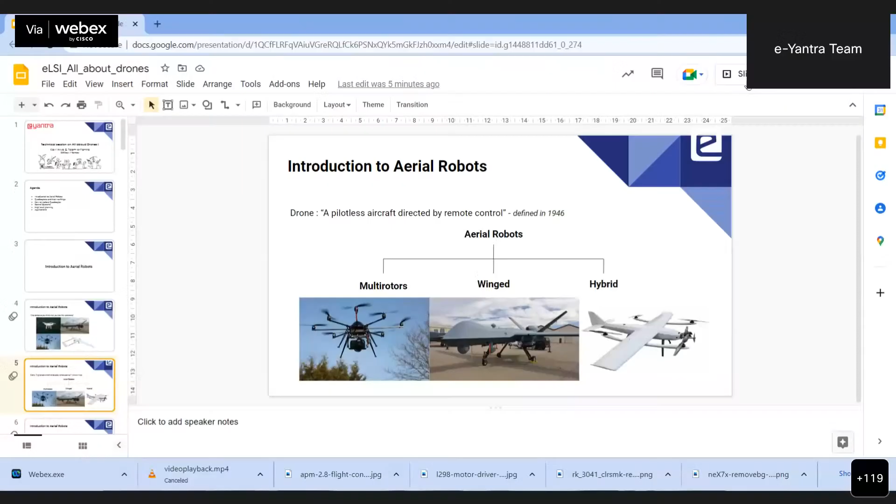So let me share my screen. Is my screen visible? Ruchi, can you just, yeah, it's visible in full screen, right? Yes, sir, it is visible.

Okay. So let us start. As you all know, this session is all about drones, and it is presented by the e-Yantra team, with Kavi Arya as principal investigator and myself conducting this session. I'm Smit Kesaria, as Ruchi introduced. I am a master's student at IIT Bombay. Previously, I was also a participant of e-Yantra. Then I joined e-Yantra, and I am a staff member of e-Yantra also. And in general, I am very crazy about drones, very interested in drones and aerial robots in general. So, yeah, that's about me.

And okay, we can start the session. So, let's first discuss our agenda today. These are the 6 points that you all saw in the poster also. What we'll do is first introduce ourselves to aerial robots, and then we'll specifically look at quadcopters and their workings, and then we'll get to know how does one make a quadcopter?

Then we'll see some little technical details about the control systems in drones, and then we'll just go through the high level planning, and finally the applications of drones in general, of quadcopters in general. So let's start with the introduction to aerial robots.

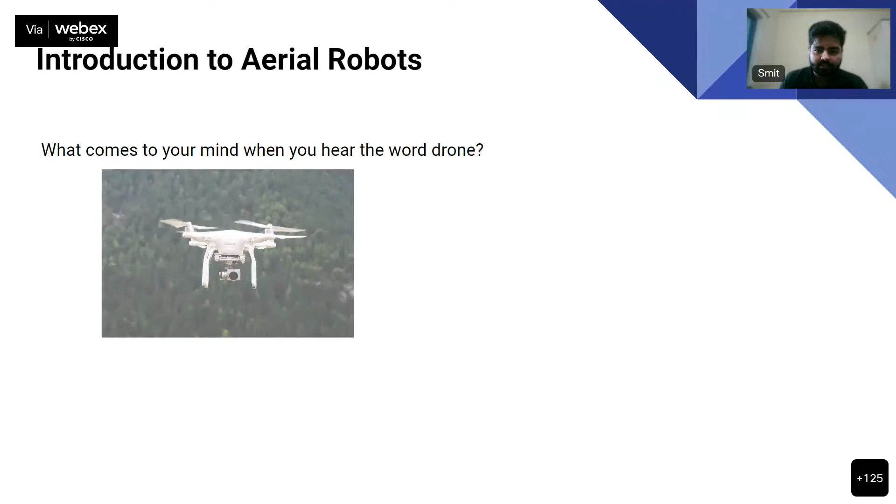Now, what comes to your mind when you hear the word drone? I'm sure most of us here might have seen or heard about drones in the movie Three Idiots. That was actually the first time I saw a quadcopter flying, or drones in general, the term drone being coined. I think that's the case with most of us. But what does come to your mind when you hear the word drone? Is it this image, or something like this, or something like this, or is it this?

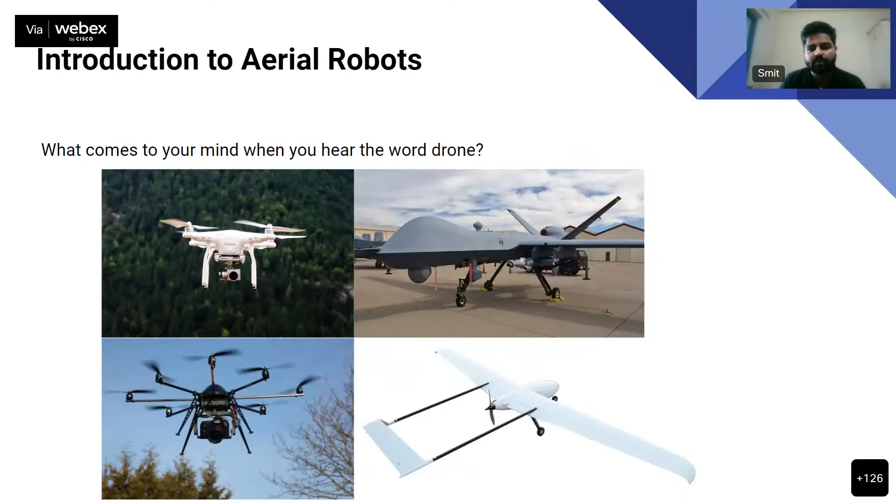I think most of us would agree that the first one is what comes to our mind when we think about drones. But let me tell you, all of these are termed as drones. Even the bigger aircraft you see on the top right is also a drone, the small plane-like thing on the bottom is also a drone, and this huge camera thing is also a drone. So let's just define what a drone is first.

It was coined back in 1946. It's a simple definition which says a pilotless aircraft directed by remote control. So if a human is not sitting on an aircraft and it is being controlled remotely, either by a computer or by a human, it's called a drone. Let's not use the word drone because it is very broad. I'll use the word aerial robots, and we'll classify aerial robots into basic things like multirotors.

These are usually plane-like structures. Again, a human does not sit on the plane. It's a remotely controlled or autonomous aircraft. So robots based on wings, usually with a single rotor or engine, or it can be a dual rotor also. But primarily, if it uses the wing to generate lift and fly, it's called a winged aircraft.

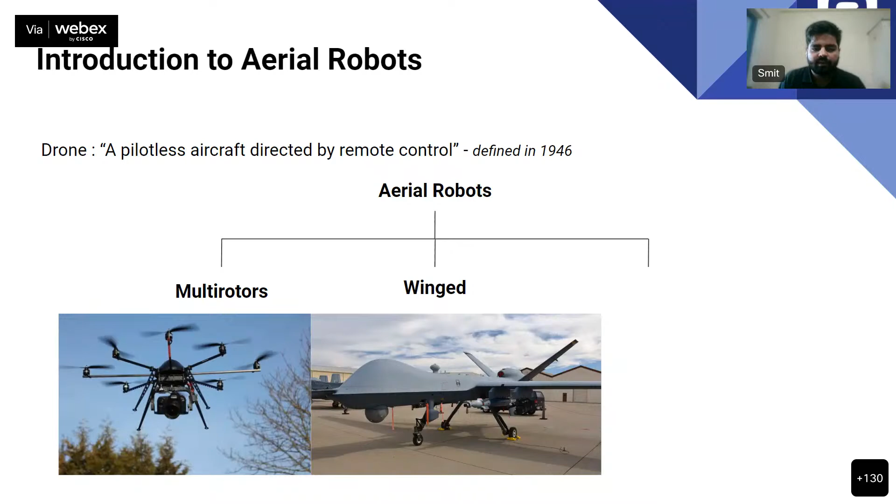And then there are hybrid aircraft, which use both. It has wings to generate lift. People might know how wings generate lift; I will not go into details, but wings do generate lift when flying in air, and if the aircraft uses wings to generate lift as well as multirotors to maneuver or do some actions, then it is a hybrid aircraft. You can see the first and second images; if you combine them and make something hybrid, this will be the result.

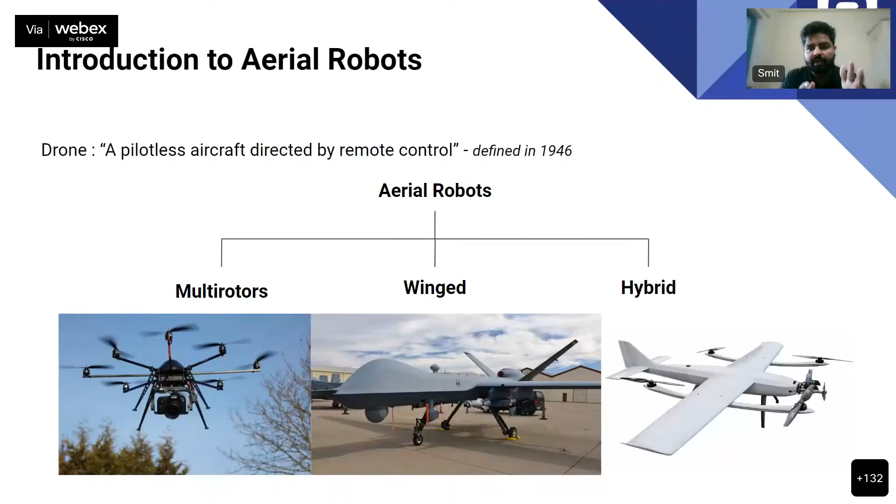For today's session, we'll specifically revolve around multirotors and not winged and hybrid aircraft. And even in multirotors, we have to see what kinds exist. Again, the multirotor definition is very simple: a rotorcraft with more than two lift-generating rotors.

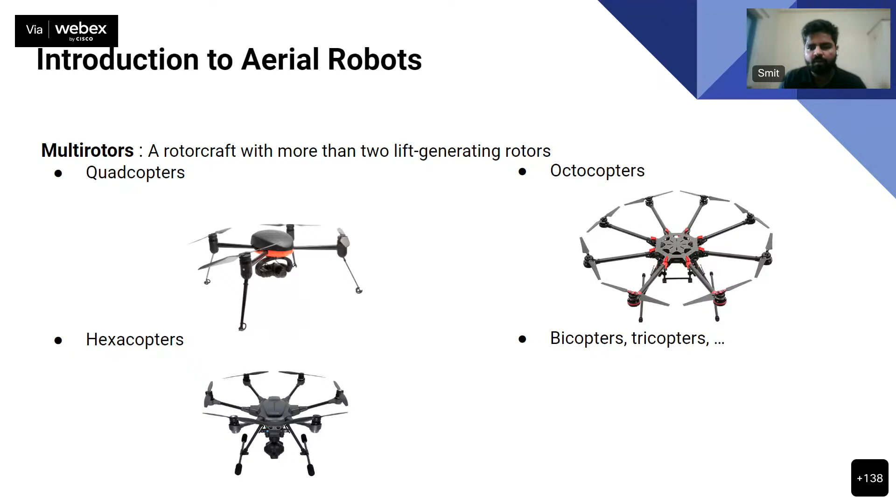Similarly, we have octocopters. You add two more motors, and it becomes an octocopter. Octo, by the name, is 8 copters. You can see in the image, they have 8 propellers, 8 motors. And if you ask why you want 8 rotors if you can do the job with 4 or 6, the answer is the same. If you want more weight carrying capacity, you have to have more thrust. Those extra motors give you more thrust, and agility also increases.

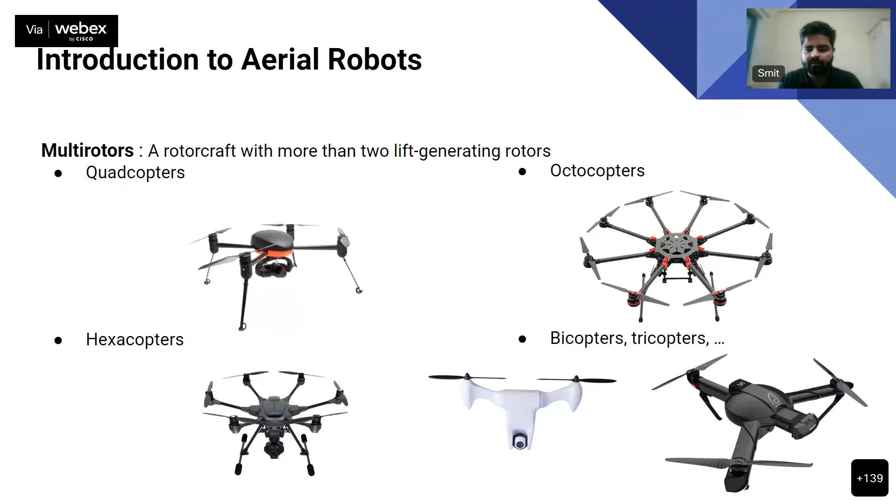You can also use fewer than 4 motors. There are bicopters as well as tricopters, and they do fly. They stabilize themselves with a few more actuators. But the actuators generating the thrust, the propulsion for the aircraft, are 2 or 3. If they are 2, it's called a bicopter, and if they are 3, it's called a tricopter. But there are some rotating actuators inside. These are very uncommon, because they are difficult to control and difficult to manufacture, and they are not famous yet. So that's about multirotors.

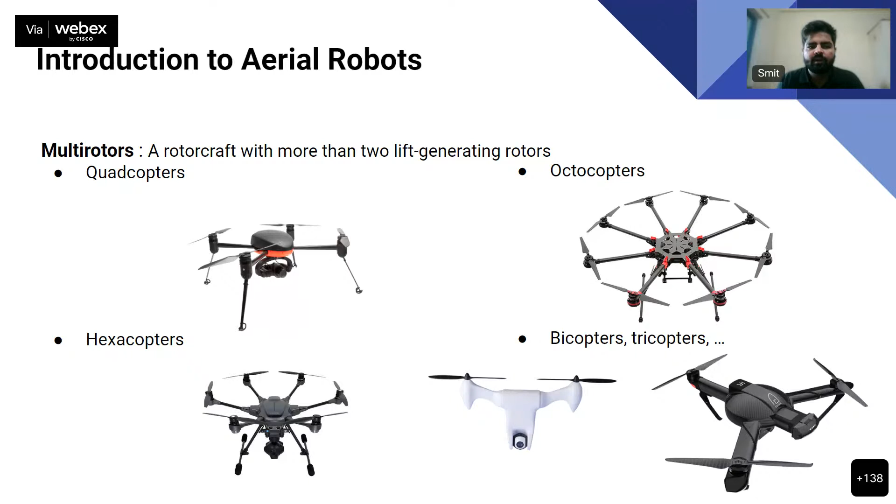Let's deep dive into quadcopters, because they are very famous, very easy, very common. Let's see the workings and functioning of quadcopters. As we all know, a quadcopter has 4 propulsion systems, 4 propellers, 4 motors, 4 thrusters. The 4 motors are usually placed in a square symmetric shape, although there are unusual geometries like trapezium or rectangle. Here you can see it's symmetric. The distance between 1 and 2, 1 and 4, and 3 and 4, every distance is the same. So it's a square geometry.

As I said, there are unusual geometries recently being used for different purposes, but let's not go into that. Usually, for a quadcopter, the propellers are placed in a square shape. They can be numbered in any fashion; different protocols are followed by different systems. The point to note is that 2 of the motors rotate in one direction and the other 2 rotate in the opposite direction. Motors 1 and 3 in the figure rotate clockwise, and 2 and 4...

I think there's disturbance from someone else also this time.

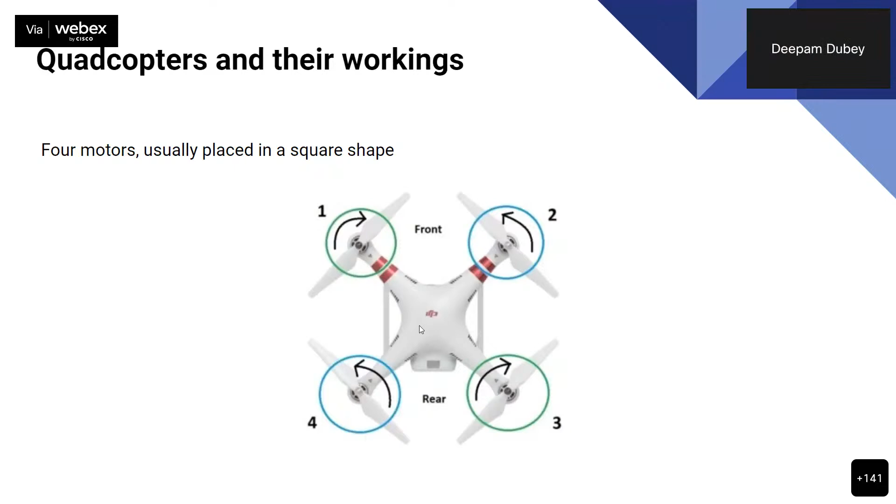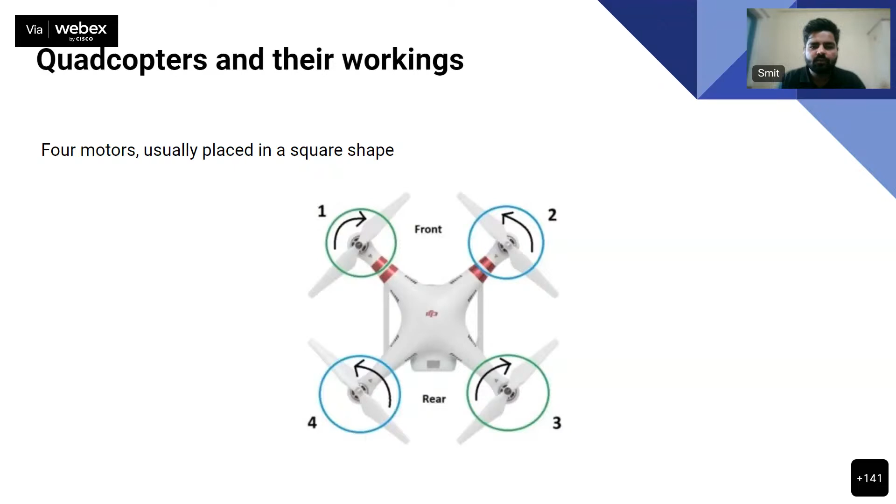Okay, I'll continue anyway. Motors 2 and 4 rotate anti-clockwise. This configuration is not random, it's specific. The point to note is that diagonally opposite motors always rotate in the same direction, and adjacent motors rotate in opposite directions. We'll figure out why this is the case, and why we can't just rotate all the motors in the same direction. We'll see in the next slide how it flies, first of all.

Since it has only 4 motors, there's a thumb rule of physics that says the number of actuators gives you the number of degrees of freedom. I won't go into detail about degrees of freedom and actuators, but if there are 4 motors and 4 propellers independently controlled, you can have 4 degrees of freedom. You can move in 4 degrees, not more than that.

Deepam, I think your mic is on. Can you please turn it off? Sir, can you please repeat? Repeat what? The thumb rule of physics you were saying. Yeah, sure. Just a second. Is my screen still visible? Yes, sir, it's visible.

Okay. What I was saying is this robot has 4 actuators. 4 actuators meaning 4 moving parts, which are the 4 propellers.

In a robot, if you have n actuators, at max you can have independent motions in n degrees of freedom. What is degree of freedom? Let's say you are moving in a particular direction, like this x-axis. That's one particular degree of freedom, moving in that direction. If you can also move in another direction, that's another degree of freedom. So lateral movement as well as rotational movements are considered degrees of freedom.

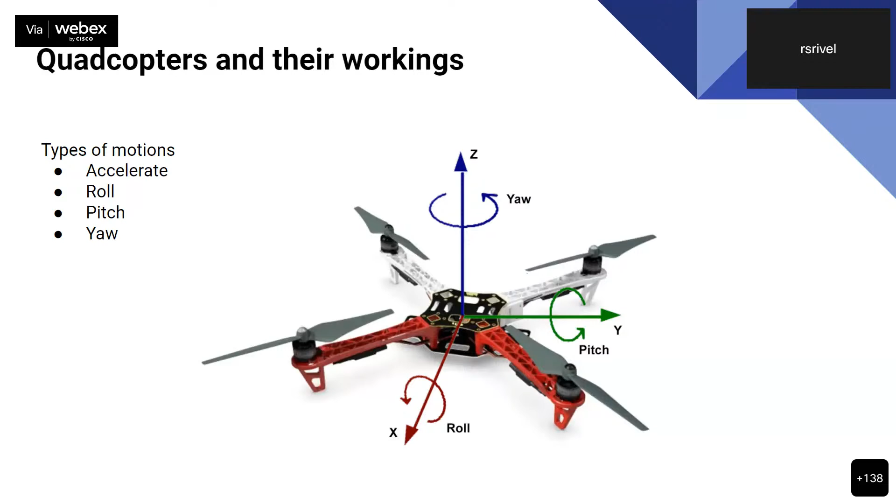I think your question is how does the quadcopter adjust its orientation by itself - is that your question? By itself, or do we have to adjust it, sir? Yeah, it's a good question. We will come to this answer towards the end, in the control systems part, where we'll see how a human pilot, or the drone itself, controls its orientation. We'll look at that later. Right now, in this slide, I'm just showing the working of the motions it can do.

We will solve that doubt definitely. So coming back to the pitch point - if I want to pitch the quadcopter, the answer is pretty simple. The back two motors, if I slow them down, and the front two motors, if I turn them faster, there will be an imbalance created across the front and back, and it will try to rotate. So that's intuitive.

But now the difficult part is how does the drone yaw? Because the thrusters were pointing downwards in the quadcopter, and we could easily create an imbalance for rotating across roll and pitch. But how does the drone yaw? Because yaw is a planar movement - the plane in which the quadcopter itself, and all the propellers, are situated. So can anyone guess how the quadcopter yaws, or does anyone already know the answer?

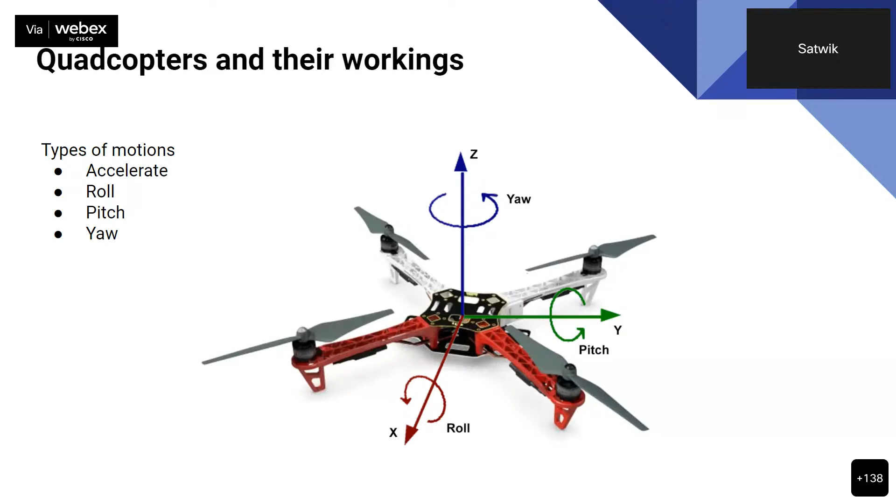The diagonal rotors will have different motion - one clockwise, one anti-clockwise. Okay, I think what I heard is the diagonal motors should rotate at a different speed, and the other diagonal rotor should rotate at a different speed - to anti-clockwise. Is that what you're saying? Correct, okay, you're also very, very close.

It's almost correct - sir, by varying the speed of diagonal motors. I didn't hear that, sorry. Decrease the speed of diagonal motor. Okay, that will do the job.

Yeah, the answer is correct, but that will not do the job completely, so if you decrease or create an imbalance.

The principle we are using here is the principle of rotational momentum. That's again a physics law: if a particular body rotates around its own axis, it has momentum. Just like a body with mass traveling at a particular speed has linear momentum, a body rotating around its own axis also has rotational momentum. And the rotational momentum of the entire body has to be conserved.

So the very first question I had was, why not rotate all the motors in the same direction? If I rotate all 4 motors in the same direction, all the rotors' rotational momentum will add up and it will be non-zero. It will not balance, it will not be zero momentum. So since the system has to conserve its momentum, the drone as a whole will rotate in the opposite direction if I move all the rotors in the same direction.

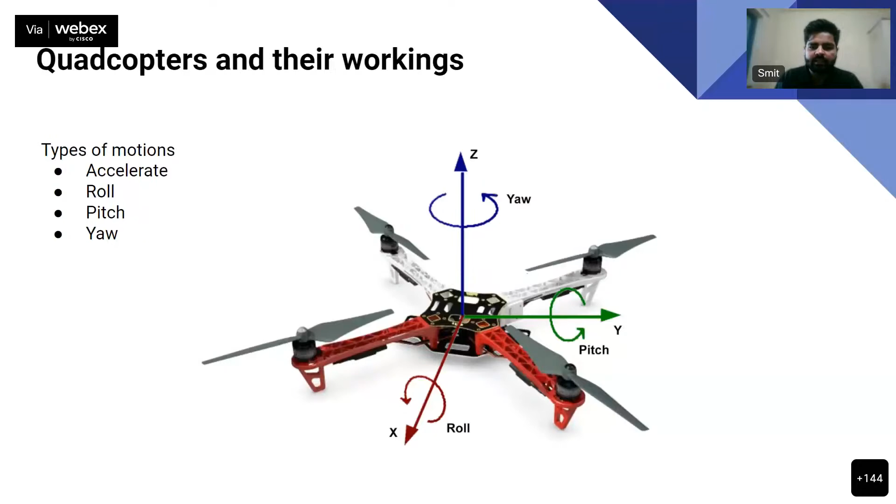So the first thing to start with is a frame. Then to fly, obviously we need propellers. So propellers should be there. But to rotate those propellers, we need to have some actuator, which is a motor. And usually, since we are making a small version, we will go with electronic devices, which is a motor again. So we'll see which kind of motors we should use.

And to drive these motors, it's not that simple. You cannot just connect it to the battery directly and the motor starts rotating. That's not how it happens. So you have to have a motor driver. So again, who will give a command to the motor driver? Should I give the command to the motor driver directly, or should there be an intermediate flight controller between us? So the answer is a flight controller should be there.

We'll later know why. So yeah, the flight controller is one of the components that we need, that takes care of all the computations and all the adjustments and intelligence on the quadcopter. So one physical board has to be there, a small kind of computer has to be there, the flight controller.

And then once the quadcopter is flyable, how do I interact? How do I send it commands? So I have to have some kind of wireless system, because I cannot make it wired. It's a remote controller. So it has to be a device, and its receiver has to be on the quadcopter. So remote controller, transmitter, and the receiver.

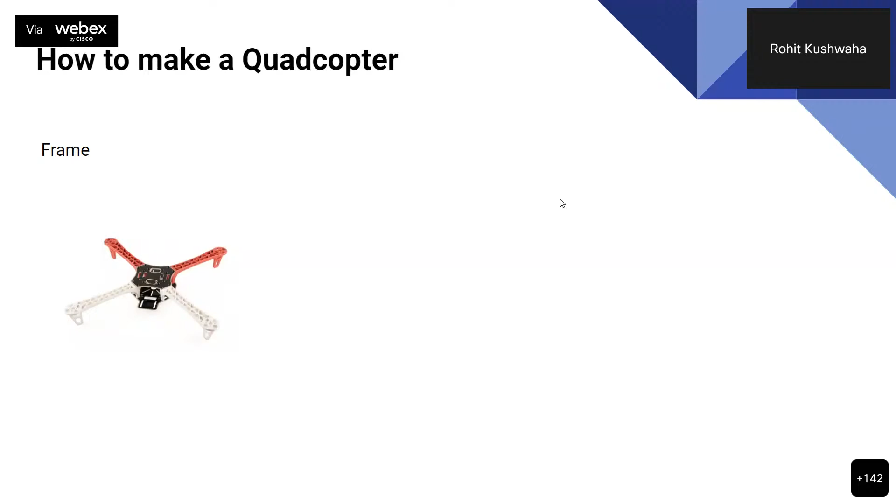Yeah, I'm back. So what I was saying is we need a frame to start with, and you can build your own frame if you want to, or else you can just buy it from the market. Let's see what the frames look like. The previous one we saw, the red and white frame, is one of the frames made of plastic.

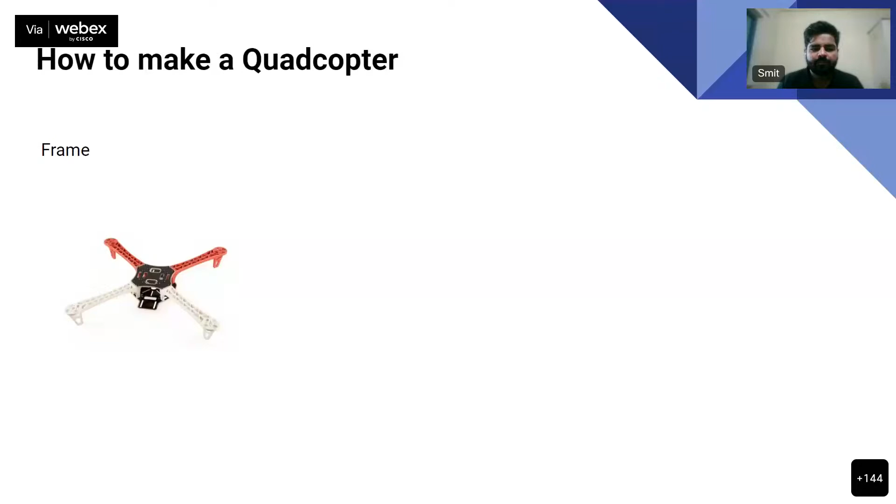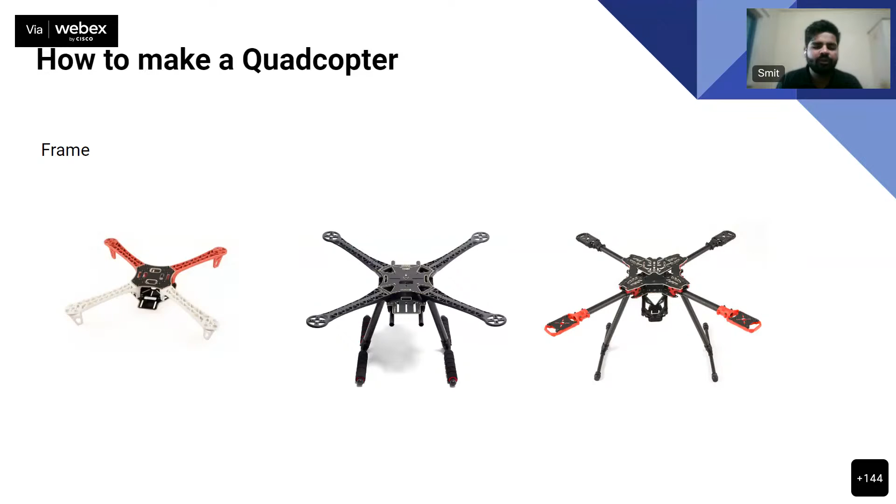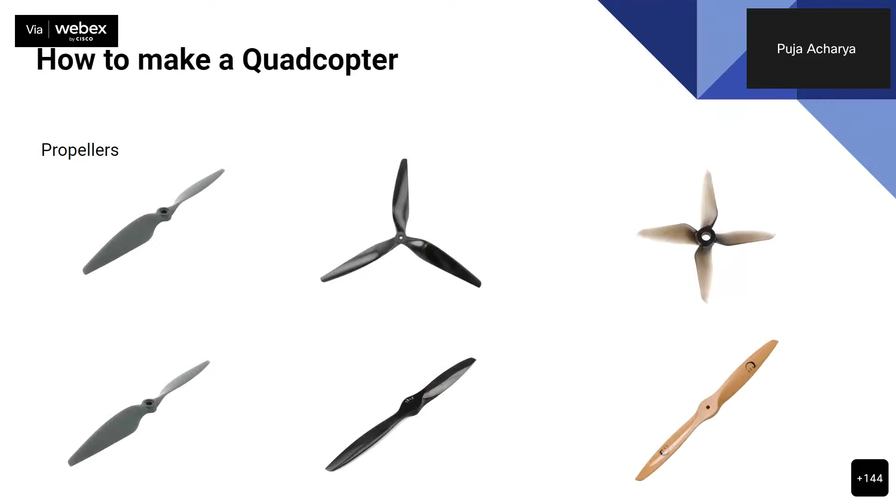Yeah. Can I ask a question on blades? Sure. Sir, why do we need 3 blades, 4 blades, up to so many blades? What is the purpose of using multiple blades in our propellers? Yeah, so the question can be answered with aerodynamic supporting theory. But if you have more surface area and more number of blades at a particular given velocity, the same velocity, you can have more thrust.

So these are powerful propellers. So if you want to have the same motor, same velocity, but want more power, then you can increase your blades. That's the simplest answer. Okay, sir. Thank you. But at the same time, you will decrease your efficiency. So battery power will be draining a lot in that case. So, yeah.

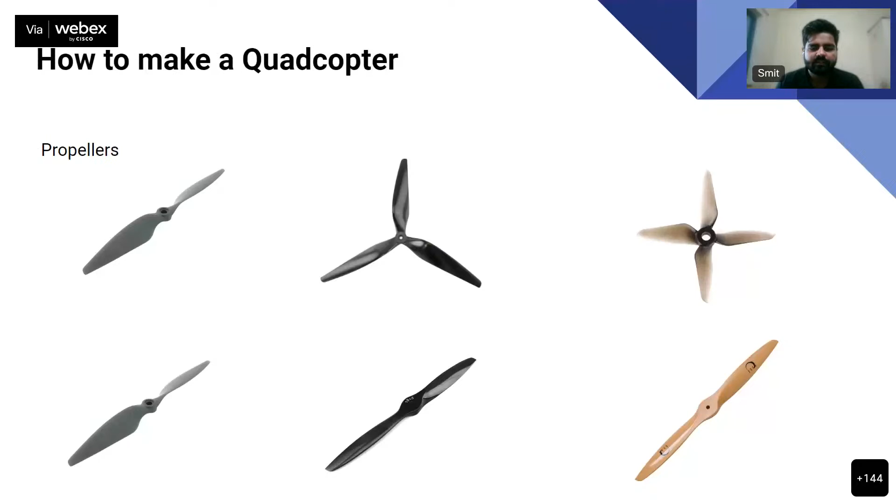I'll not go into details of what brushed and brushless are and what the advantages are. But just for now, you can remember these are the brushed motors, which are not that efficient, not that reliable, and not long lasting either. So you can think of the brushed motor as the bad guy. I am making an impression here, but you can think of it as a bad guy. The good guy here is the brushless motor.

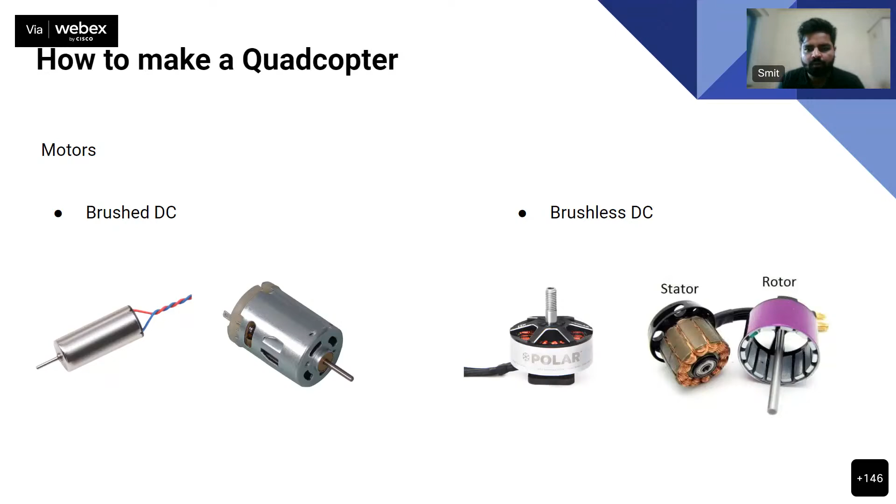So this is the type of motor, and let me tell you clearly that most likely whatever quadcopters you see around you are made using brushless motors. A very small fraction of quadcopters in the toy or small ranges use the very first motor shown in this image. Among the 4 images, the very first motor on the left is used for very tiny quadcopters. But apart from that, usually brushless motors are used. And if you plan to make your own quadcopter, this is what you have to go for, brushless motors.

So now coming to motor drivers, as I said, motors are complex to drive. You cannot just connect the power to the motors. You have to drive it through a driver. So again, there are two types of motors, and there are two types of drivers also. For brushed motors, we have simple drivers. These are usual hobbyist or enthusiast components found in online stores and offline stores also. This is an L298N driver. I'll not go into the details here again.

But coming to the more important point, the brushless motor drivers have a specific name. They are called electronic speed controllers. There is no fancy thing in the name. They are electronics and they control the speed of the motors. That's why the name electronic speed controllers. These are usually used for brushless motors, and they look something like this. So you have 3 wires for the motors, 2 wires for the battery, and some signal wires to control.

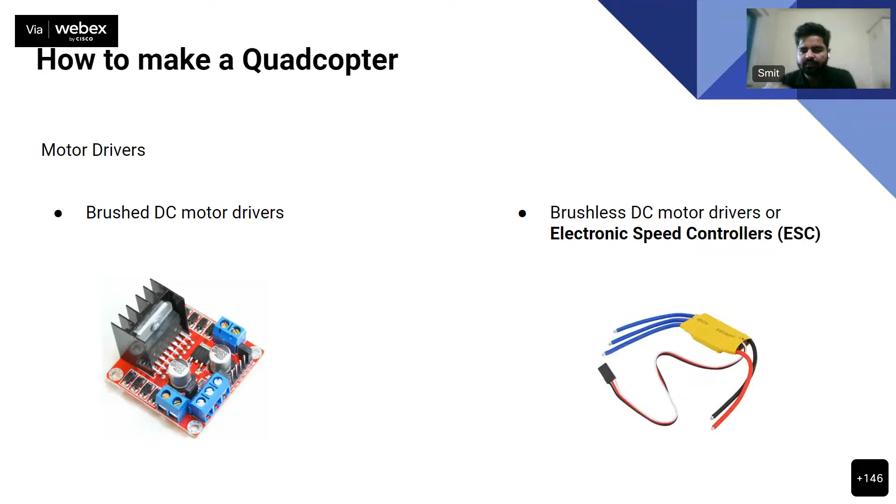So, okay, now we have our frame. Now we have the propellers connected to our motors. Now who will fly? Who will send the commands to the motor drivers? So as mentioned previously, we need a flight controller. So flight controllers, how do they look? So very famous flight controllers that some people might have heard about if they are interested in drones or quadcopters.

This is the Pixhawk. So what is Pixhawk? It's not a company. It's not a single board. It's a standard defined by a particular organization, and whoever follows that standard of manufacturing is termed as Pixhawk. So this is one of the very old Pixhawk boards that you see on the left. And similarly, there's again a famous term known as ArduPilot or the ArduCopter flight controller. So similarly, one of the organizations had created a standard, and they had come up with this particular flight controller. But what you see on the rightmost, the black part, is a general purpose flight controller.

So if you are good at designing electronic circuits or building them, you can design your own flight controller. The main thing to notice in all the three is it should have a microcontroller. People from electronics, telecommunication or electrical backgrounds might know what a microcontroller is. But for other people, microcontrollers are microscopic computers basically. They run software, but they are very small in size. So in the center, we should have a microcontroller first. And the second important thing is we should have a sensor. Sensor for what? Sensor for rotational feedback.

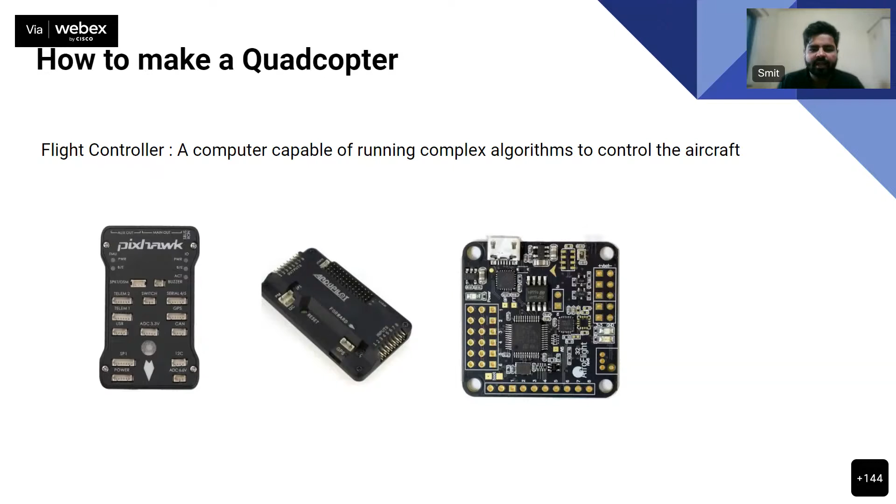Okay, sir. Yeah. So continuing, these are the flight controllers that you can buy off the shelf. And, as ma'am was suggesting, they also have a flight firmware that goes inside, which is readily built by someone else. But as engineers, we do not like systems which are pre-built or just assembling things here and there. If you want to learn things, you can build your own flight controller.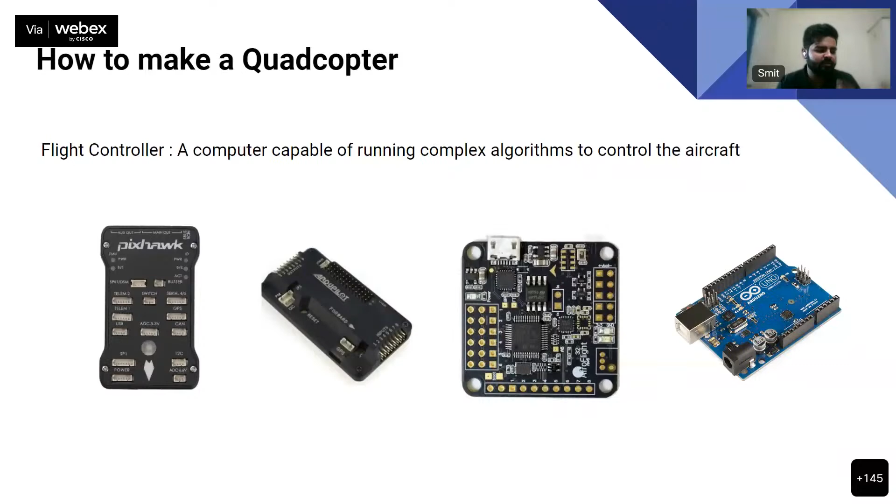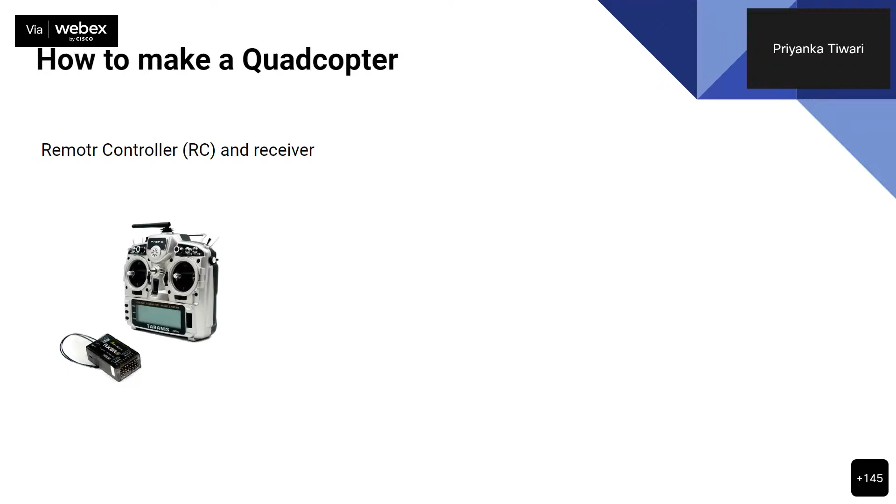We have all seen basic remote controllers like this. We used to play in our childhood with remote control cars. So this is a very big fat joystick, and its receiver is also present. The big thing is the remote controller, which has a wireless antenna, and the small black thing that you see is the receiver. It will go on the quadcopter, and the transmission will happen wirelessly.

But this is very expensive in general. This particular variant that you see literally costs 20,000 rupees. So everyone cannot afford this, and everyone does not want this complex thing.

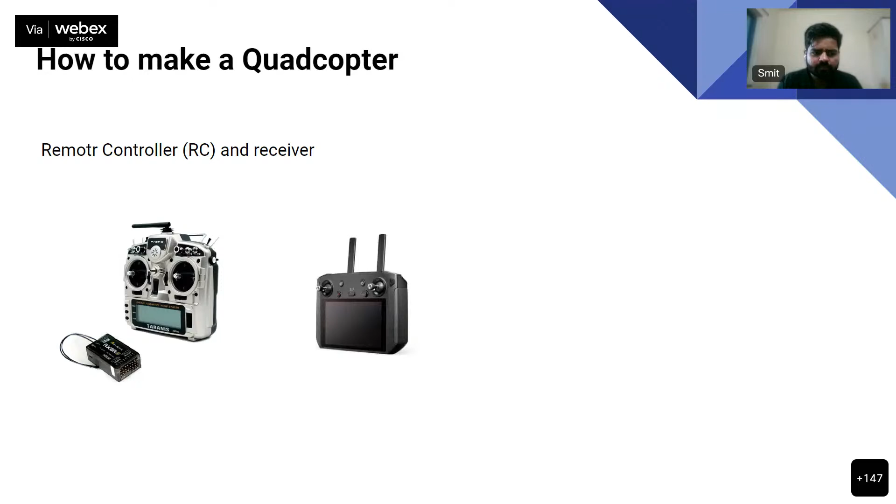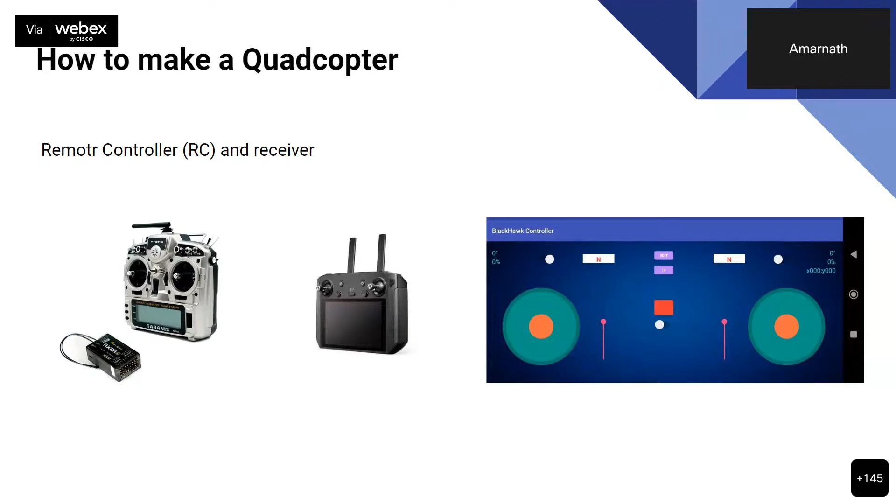So this is again an expensive one, but this is an app. Everyone has smartphones these days. So we can simply have a virtual joystick on our phone that will do the same job. Instead of the antenna communicating wirelessly, we can use our Wi-Fi. This is what you can use if you build your own quadcopters or modify the workings of existing ones. And we are all students, so we have budget constraints. So this will save us.

I'll just add a point that this particular app was built by an intern at e-Yantra, who came to the competition, performed well, and got an internship in e-Yantra. During our internships, we built things like these. This app was built by the student from scratch within the span of 6 weeks. The motive was to eliminate these big fat controllers and have a simple and common solution for us.

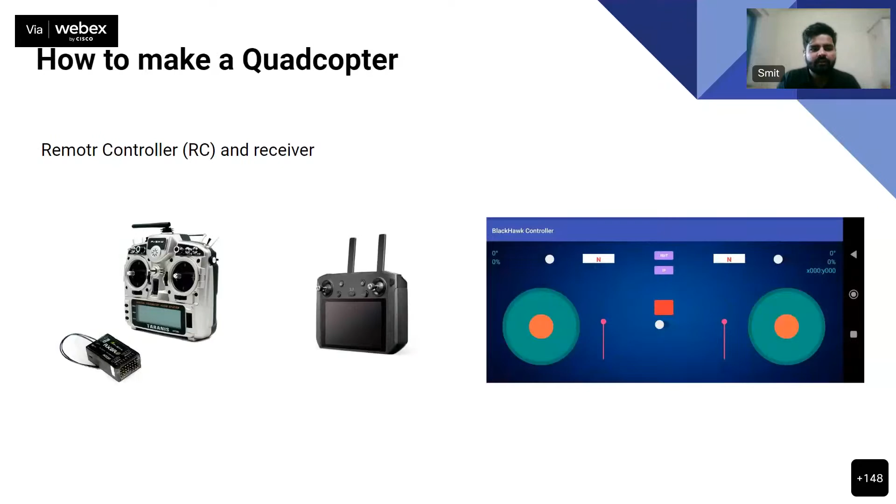So you can have any of these kind of joystick-based controllers with some buttons here and there to control the quadcopter. Continuing. So now the quadcopter is functional. It has motors, it has a flight controller, it also has a remote control interface with myself.

But if I want it to stay stable by itself, stay at the position where it is by itself, I do not want to give any inputs, I just leave my hands from my controller, and I want it to stay wherever it is on its own. So I need some kind of sensor to read my current position on the quadcopter, so that I can at least know where I am standing, and if I am moving because of the air or other disturbances, I have to correct myself. So some kind of sensor, some kind of feedback has to be there.

And for that, as I mentioned previously, the GNSS, Global Navigation Satellite System, receiver has to be there. As we all know the working of GPS, GPS is one of the GNSS, of the USA. So let's not use the word GPS as a general term, because the general term is GNSS and GPS is the GNSS of the USA. We also have our own GNSS, which is NavIC, if you might have heard about it. And other countries also have their own. For example, Russia has GLONASS, China has BeiDou, Europe has Galileo. So these are all satellite constellations, and in general, it is called a GNSS receiver.

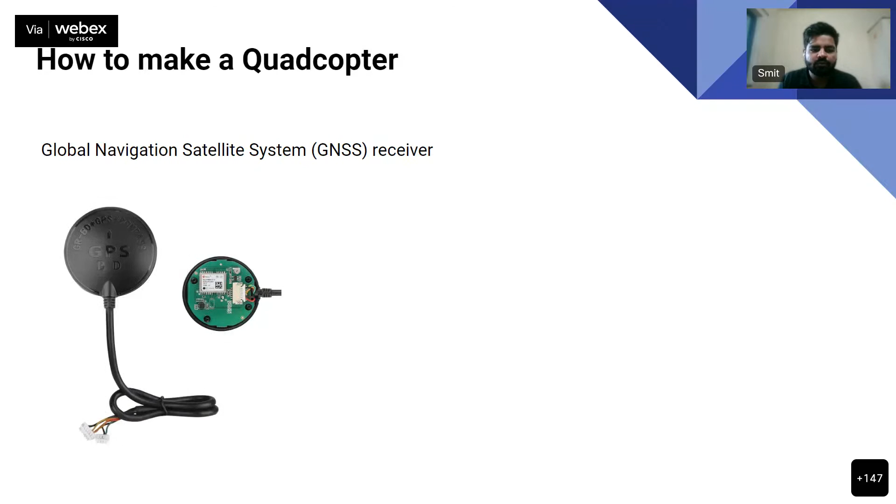Finally, we need... Sir, I have a question. Yeah. Sir, I'm a little bit confused; in an earlier slide we talked about IMUs. So it also gives position, and GNSS also gives position. What's the difference? No, that is incorrect. IMU gives orientation. Whatever the angle of the drone currently is, it just reads out the angle. Let's say the drone is tilted at this angle. At this position it will read the same angle, and if it moves here and there, the angle is the same. It will not know the position has changed; it can only read the angles. Okay. Understood, sir. Thank you.

Sir, I have a question. Where do we use telemetry then, like in the remote controller and receiver? What is the purpose of using telemetry? Telemetry is a very general term. Telemetry just means to and fro communication. If I want to communicate with my quadcopter or drone via some other device, like the remote controller, which itself was a device, now they both are communicating. So this is a form of telemetry.

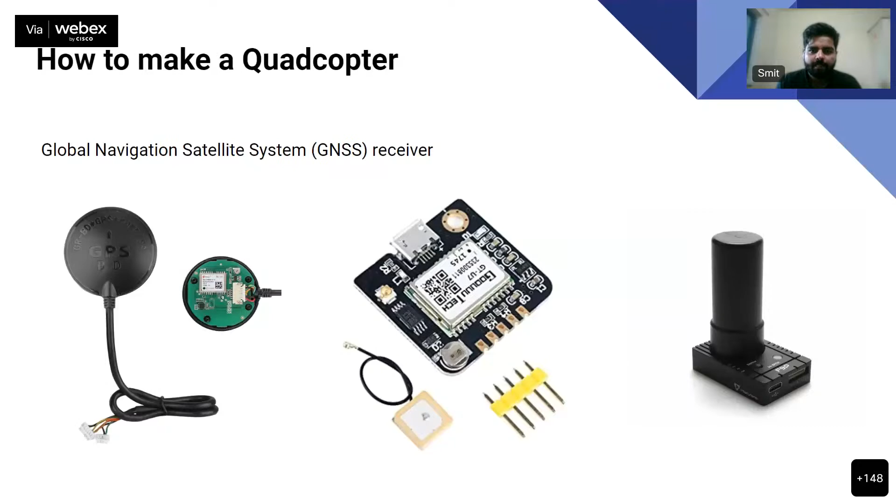Okay, sir. So if there are no more questions, I will proceed further. Everything is done, I think the motors, the sensors, the flight controller are here. Now to power everything, we need a battery definitely. So let's- Sir, just a question. Yeah, please go on. Hello, sir, I have a question. Yeah, tell me. And you can go ahead with the question. Hello, am I audible? Yes, you are audible. Whoever has the question, you are audible, kindly go ahead with your question please.

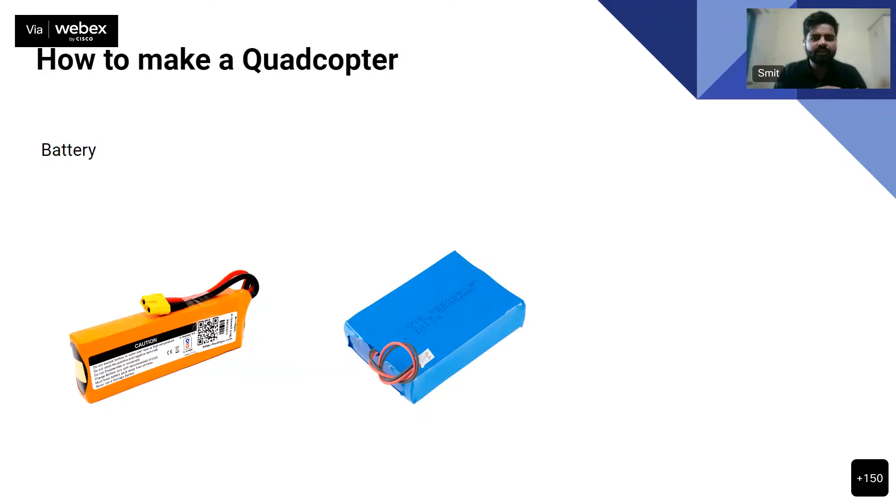There are lithium-based cells also, just like the ones we use in our remotes and all, but they are actually based on lithium salts and lithium technology. So we can also build battery packs using cells, though that's not commonly used in quadcopters. We can also have nickel metal hydride, a salt that is used to make batteries again. It's a separate, not a lithium battery, but this is one of the common batteries seen around in robots. But specifically for quadcopters and aerial robots, the first one you see, the lithium polymer based pouch type battery, is usually used.

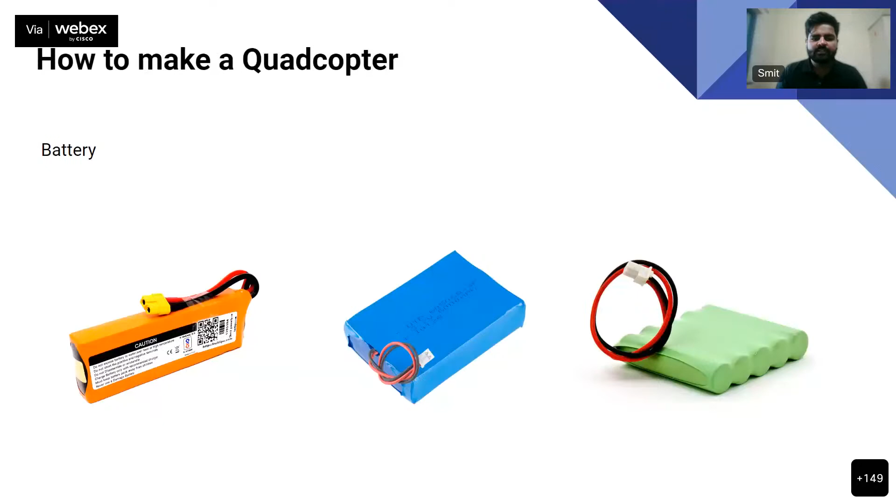So the last thing, now all the hardware things are taken care of, but at the end we have to have our software that runs some algorithms and calculations continuously for us to be able to fly the quadcopter. So the last but not the least thing required is the software or firmware that goes on the flight controller board we chose earlier. Now there's no need to worry because although it's a fairly complex piece of software, not something one can write and learn very quickly, there are options already available: pre-written codes, pre-made software on the internet, free for all to use.

Some of the popularly used ones are the PX4 flight controller software. Do not confuse PX4 with the PixHawk that you saw - they sound similar but are different. The PixHawk was a standard for hardware, and PX4 is the software that goes on those hardwares. PX4 is used for autopilot systems, as ma'am was asking previously, if you want an autopilot feature instead of a human controlling it manually. This is one of the very widely used systems, PX4 - you can go and check about it later. The similar alternative is ArduPilot, an ecosystem for autopilots again, free to use for all.

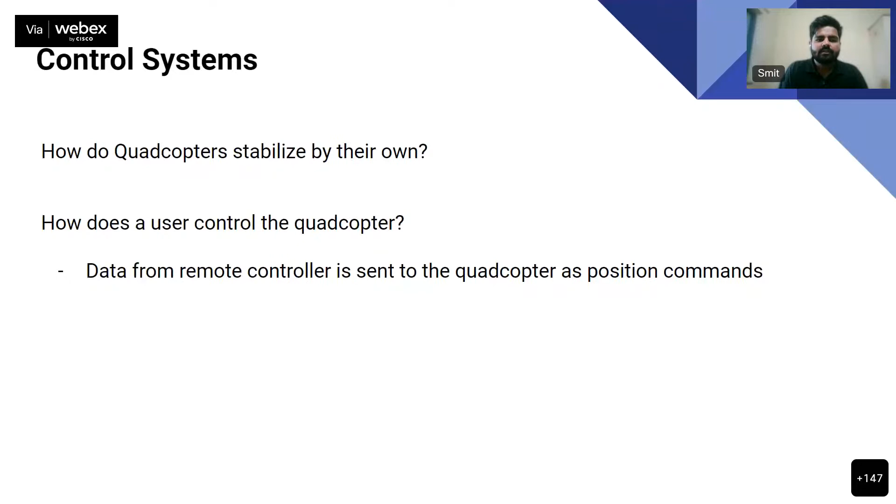But how does the drone make sense out of those commands? How does the drone actually implement those commands? Let's see the structure of control systems.

Starting with basics, we all know that a quadcopter has motors which make it fly. But the motors have an interface - we have to provide voltage, we have to provide the current to the motor. Obviously a human would not want to change the voltage and current manually, so we have a driver that drives the motor. Now to the driver, what is the input? The input is RPM - the driver just wants to know what RPM the motors have to be rotated at, and it will take care of it. But again, the RPM has to be decided by someone.

Is it us? Is it the user? Do you think sending all four motors' rotation speeds would be easy to control the drone? I'd have to take care of all four motors, have an algorithm in my mind running continuously, moving all four RPMs to make the quadcopter move. Is that feasible at all? In fact, the human brain is not even capable of doing that.

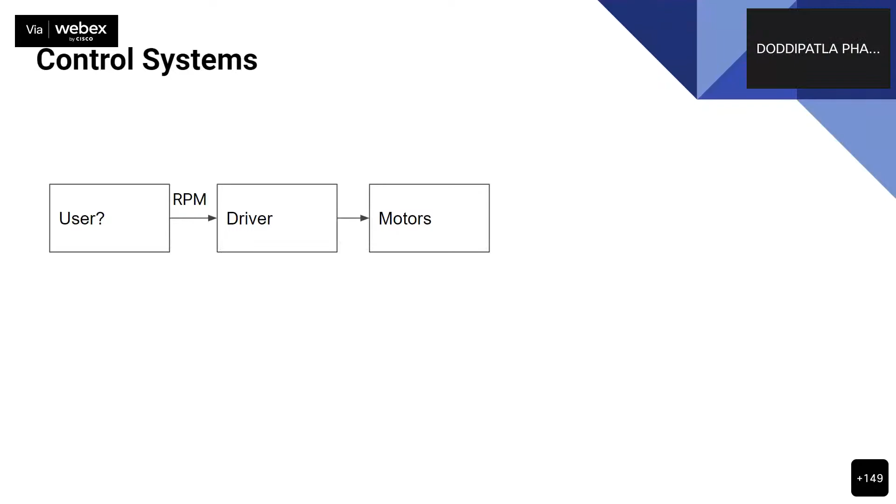So we have to add a controller in between. What does this controller do? Instead of the user giving commands to the driver directly, the user gives commands to the controller, and those are easier commands - angle commands now. The user is just giving angle commands to the controller, and this controller takes care of the orientation control of the quadcopter.

Now, what is the interface? If I just let the controller know that I want the quadcopter to be tilted at 5 degrees in the pitch axis, this is my command to the controller. Now the controller has to make sure that the four motors are driven in a particular fashion such that the 5 degrees of pitch is maintained, and that will control the motor drivers, or motors in general. So the controller does my job. So how does it do it?

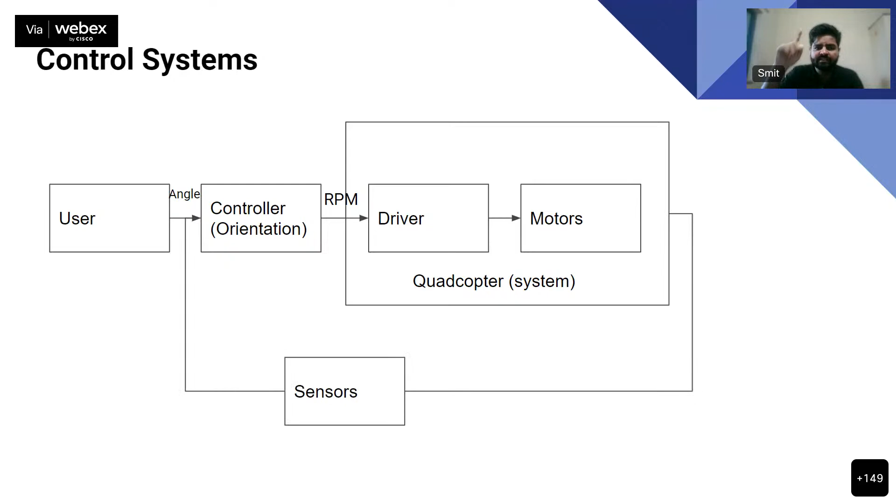So let's just define the driver and the motor collectively as the quadcopter system. And then we have a sensor. Previously, we saw there was a sensor that used to give us the rotation. Can anyone recall it? Let's see how much attention we're paying in the session.

Sir, the IMU, full form inertial measurement unit. Yeah, inertial measurement unit is the sensor that is used to read the current orientation of our quadcopter. So now if you see in the diagram, what is the job of the controller?

Controller has two inputs now. Controller has the user angle, what the user wants. Yeah, feedback, you're correct, it is a feedback. The user gives it the angle, it has to go at 5 degrees. Then what the controller will read is what the current angle of the drone is. Is it 5 degrees? Is it 1 degree? Is it 0? Whatever it is. If it is not 5 degrees, it will know the error.

Now, with some basic algorithms written inside, the controller will try to minimize that error. So it will try to take the entire quadcopter to that particular 5 degrees or whatever set point the user has given. So it knows the current reading, it knows the user's input, and it tries to match both. This is what the controller does in general, the firmware that it does in general. So it takes the angle inputs from the user, it takes the angle inputs from the sensor, and it drives the motors accordingly to perform the particular action.

So this is the orientation controller. Now again, think about whether it is a little more, or is it okay for the user to give the angle commands? It is okay, it can fly definitely, but is it easier?

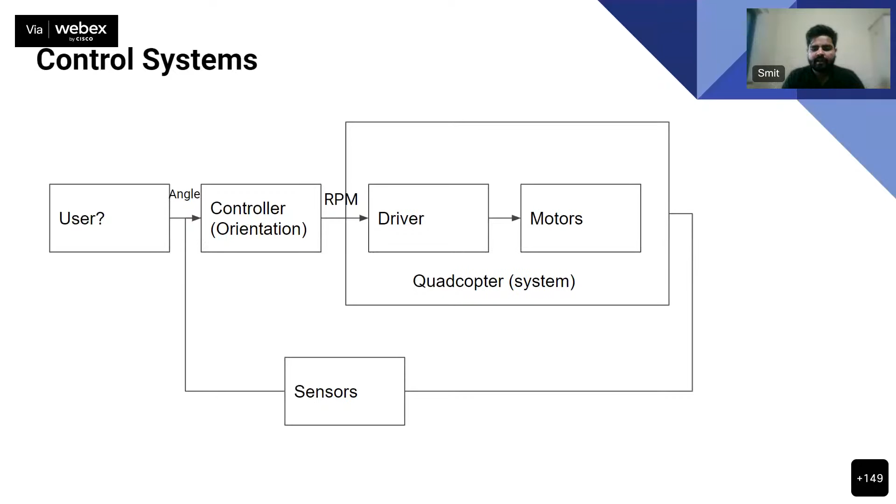So what we do is just add one more controller. Now the user does not give the angle. The user gives a higher level, easier command - a position command. So if the user just wants the quadcopter to stay at a particular position or go in a particular direction at a particular speed. Do not confuse - previously, the user was not giving any kind of speed or position, the user was just giving angles of the quadcopter. And now the user is giving position level commands, either go to this position and lock yourself, or move in this position at this particular rate, at this particular velocity.

So the directions are easier for us to understand - the X, Y, front, back, and up, down axes. So we have to have a position controller to implement this. So what does the position controller do? It takes the position input from the user and converts it to particular angles, and feeds it to the next controller that is taking care of the angles.

So now is the diagram complete? Just the position from the user, is that enough? Is this enough? How does the drone, or how does the controller, know the drone's current position? Can anyone tell? Something is missing in this diagram.

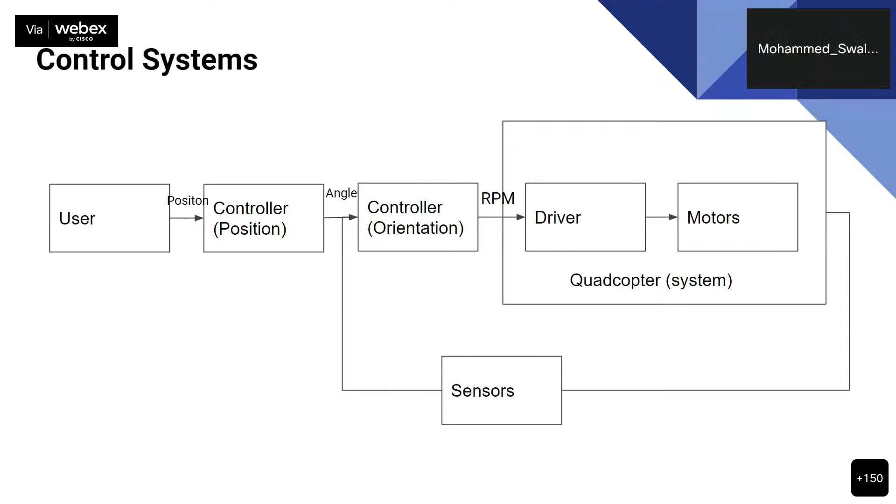The user should give the direction controls. Yeah, user is giving the direction controls. But if you compare the previous diagram, the controller diagram of the orientation, it had orientation commands from the user and it had orientation feedback from the quadcopter, so it can check the errors, it can check what has to be done. But now in this diagram, something is missing.

The GPS. Perfect. So some kind of sensor is required for position. Till now, we do not have any sensor for position. So the sensors have to have a position command also fed back into the controller - this is what we mean as feedback. And I have just created the same block for both the sensors, the IMU and the GPS or GNSS sensor. So again, the GNSS sensor's feedback will go to the controller, and the controller has a similar job to do.

Take position inputs from the user, read the current position of the quadcopter, and see how much error is that. And then with some formulas, with some algorithms, you convert those to actions in roll, pitch, and yaw. So now this is the complete system that we have built, and this is called a controlled system.

So if you see the quadcopter as a system, it just existed as a system. It was not controlled. It was not controllable as such by the user easily. But adding these blocks, adding the controllers for orientation, adding the controllers for position, and adding some sensors, we have created a controlled system. So this is what we mean by a control system. And I think some of us might have already done these subjects.

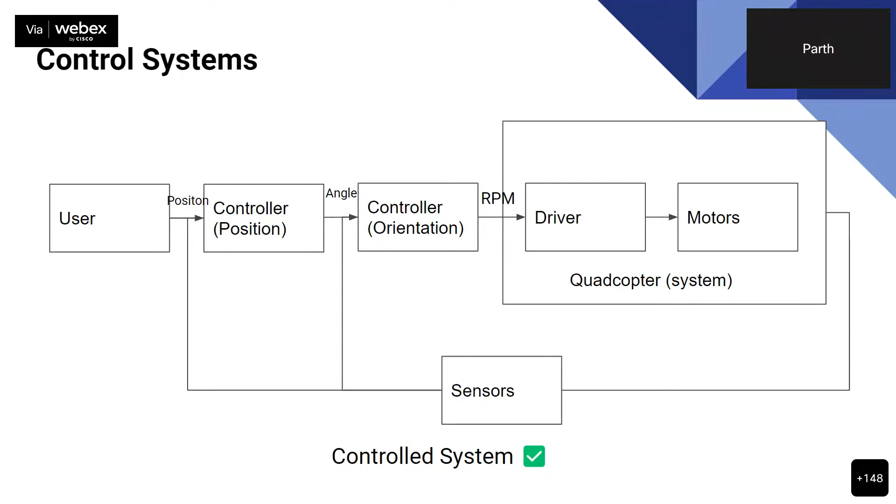Yes, so I guess 2 years before there was the Vitarana drone theme. Yes, sir. I did not participate, but later I saw there was something like a PID controller. So is it the same thing which is being told? It's the same thing. Now I have not shown how the controller functions internally because it's very complex. So it's not in the scope of this session. That is what you will learn in the competitions. Okay. Thank you, sir.

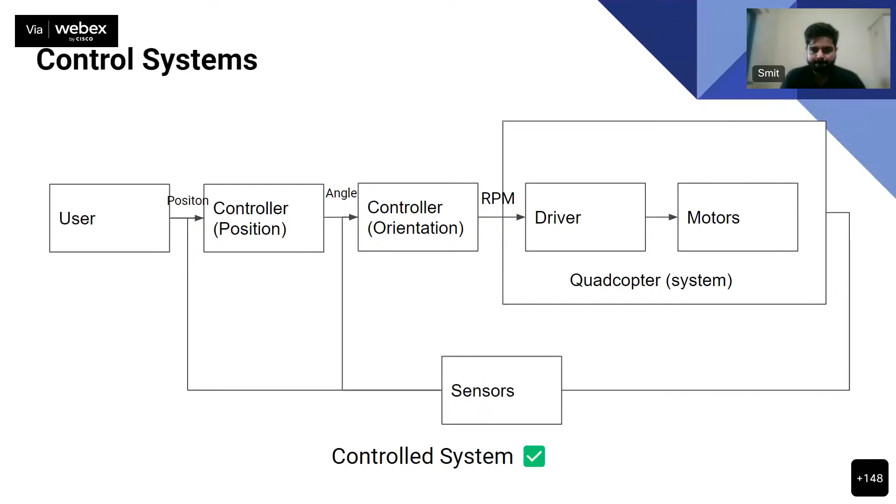Any other questions at this particular point about control systems? Okay, then I can move forward. So till this point we have made our own quadcopter. We have taken care of the control systems, all the firmware that it has. Now it is able to follow human commands. But what if I want to make it completely? Yeah, someone had any question?

I think no. Okay. So what I was saying is now the human is able to control the quadcopter in a position or an angle mode, whichever the human wants. But now if I want to make it hands-free, remote control-free, and a little more autonomous, then what to do? That's called higher level planning. So you plan some things before. You tell the quadcopter to do this particular action prior to the flight, and then the quadcopter executes those steps or motions in a particular sequential way.

So then the user does not have to control it manually or make it go to a particular velocity or position. The quadcopter does it by itself. So how does that happen? There are two stages of higher level planning. One is called a mission mode. People who are familiar with PX4, Pixhawk, ArduPilot, Octocopter might have seen or at least heard about this kind of thing, which is called a mission mode.

Now, what is mission mode? Since we already have our GPS or GNSS sensor, we can give it coordinates in latitude and longitude on the Earth. So let's say your task is, just imagine, you want the quadcopter to fly from your house or your building or a college and just go and land at another particular place, another particular building. You don't want to control it by yourself because it's a very long distance and you cannot even see the quadcopter.

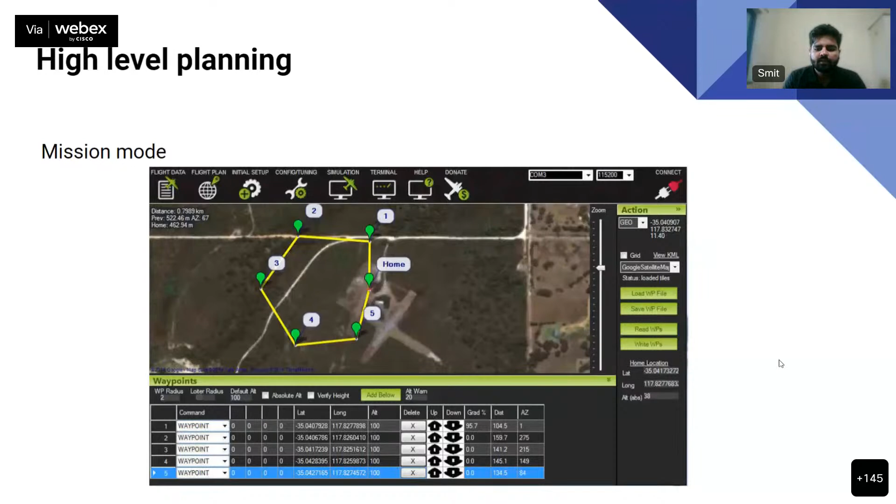So going for more autonomous things, there is path planning on board. The path planning that we saw is done by humans, and the path planning that I'm talking about now is completely autonomous. This is a little complex. Once you are familiar with this, you can go forward with it. There are two basic scenarios. One is a known environment, where you have a map. It's just like Google Maps, we have details about everything: the buildings, the roads, sometimes information about the trees also.

A star is one of them. I'll not go into the details, but I'll just list everything. A star is one of them, which is the very well-known algorithm to solve path planning. Dijkstra is one of the algorithms, which is a pretty common name. And rapidly exploring random trees is an algorithm for path planning.

So now let's say that's okay. When we know the environment, it's easier. There are buildings, there are trees. We all know them, but that's not the case always. Now just consider a hypothetical scenario of going to Mars. Recently NASA launched the rover as well as a drone. It's a single drone on the Mars planet. So now the environment is not known.

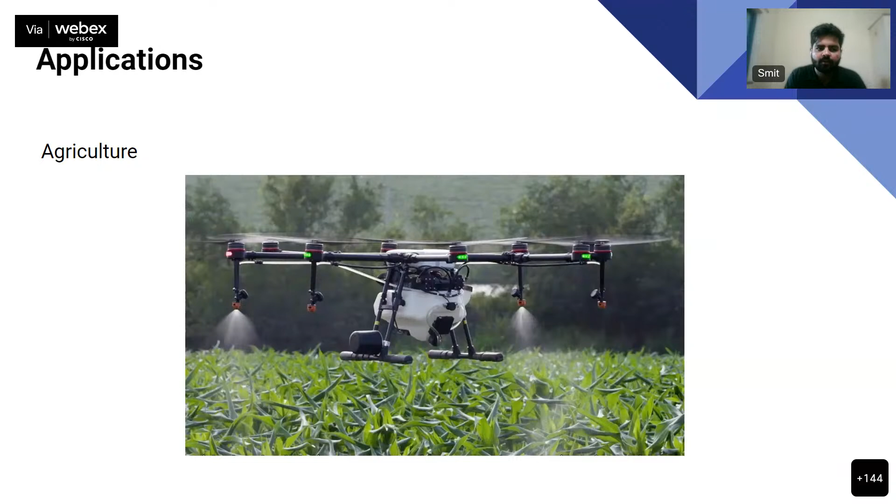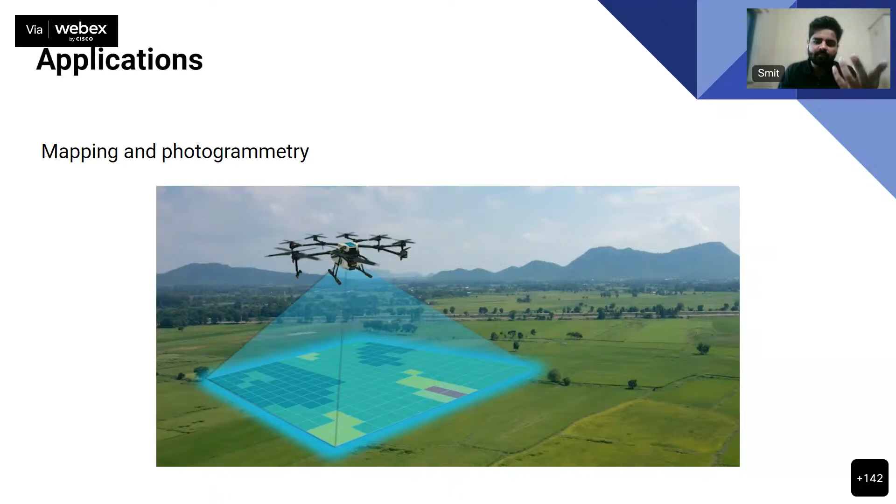Continuing, so photogrammetry is a recent technology that is very, very useful to create 3D structures, reconstructions, and can be used anywhere. Another commonly known application is surveillance. Authorities, police, or security, simple.

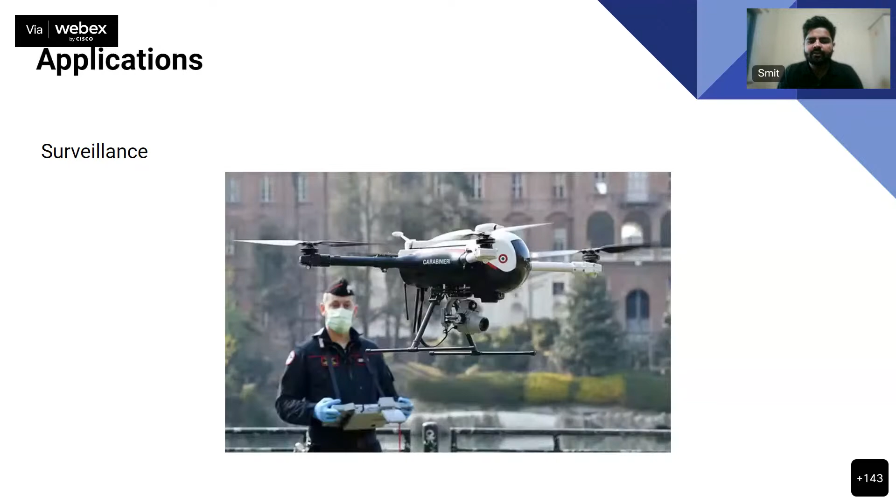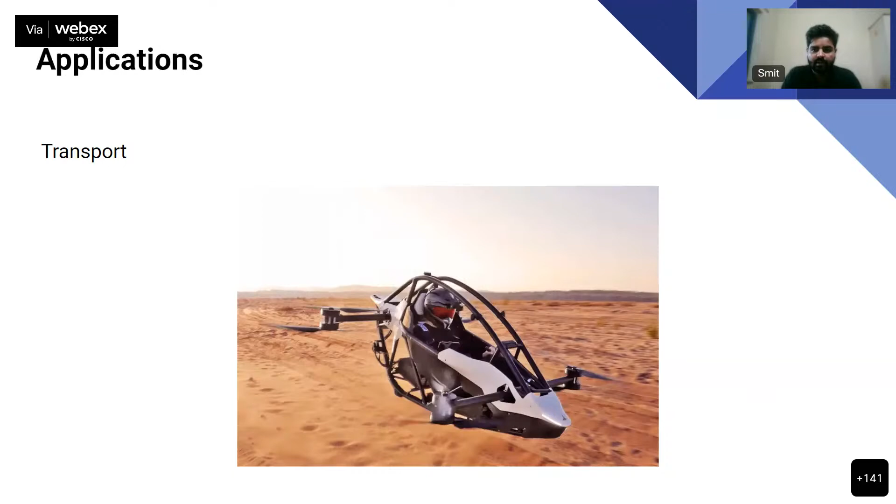But the structure that you see is not like the usual helicopter that has a single rotor. This is again like a quadcopter or an octocopter. So the working is similar, the structure is similar, just the human is now sitting inside. It has capacity to take that human and travel. So this is another future application.